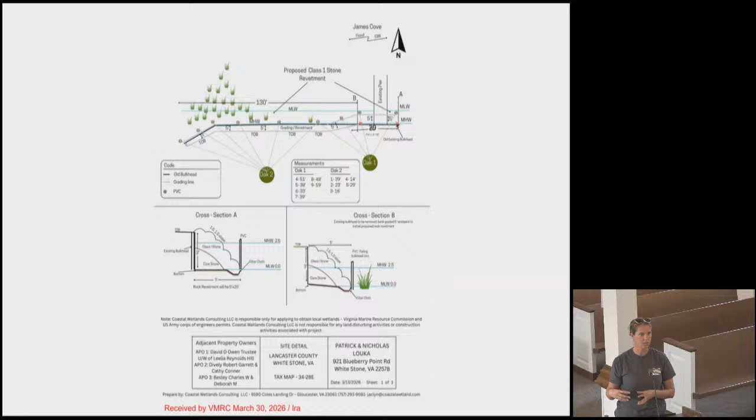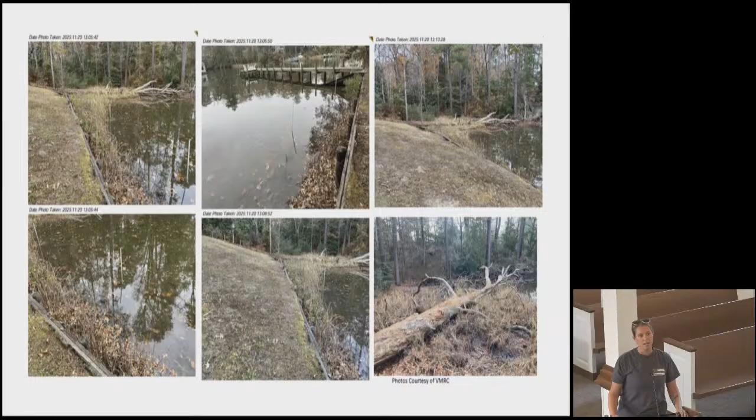Thank you, Madam Chairwoman. So what we want to do is grade the bank back 5 feet to get it in front of the existing wetlands, and then have the revetment go from there. The 20-foot under the dock, because there's no existing wetlands there, we decided not to mess with it and still have it in front of that bulkhead, which is also helpful. So it just kind of curves in, going behind all the wetlands out there. Is there any questions or concerns or anything like that?

Madam Chairwoman, if I may, if you look at the pictures on the screen, you can see what Jacqueline is referring to with the wetlands underneath the pier there. That's where the revetment is in front of that, and then they're going to grade that bank back. So that revetment will be more in the RPA, still a little bit in your jurisdiction in the back shoreline there. But that's what we're looking at today.

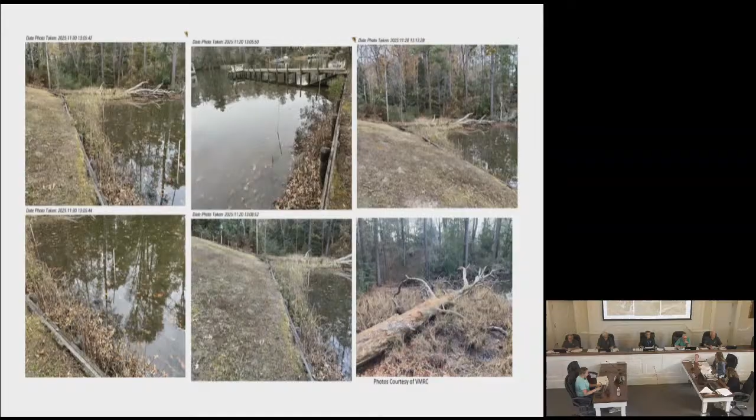Thank you. So you need a motion from the board. We want to ask VMRC their comments, and then the public hearing. Okay, do you have anything you'd like to add, ma'am?

No, ma'am, thank you. Is there anyone in the audience that would like to add anything? Anyone on the board have any comments? No, ma'am, I don't have a problem. If not, I'll entertain a motion.

Move the project be approved as presented. Was there a second? I'll second. All in favor, signify by raising your right hand. Okay, thank you.

All right, Madam Chairwoman, our next public hearing is for AJ Kuntamakala and Lavanya Reddy, care of Salterra Solutions LLC, PO Box 1744, Kilmarnock, Virginia 22482. The agent requests permission to install 360 feet of riprap revetment, Class 1 and 2 stone, 2 100-foot stone breakwaters, and 1 50-foot stone spur, Class 2 and 3 stone, with 9,000 square feet of sand nourishment and 900 square feet of wetlands plantings along the eroded shoreline of the Chesapeake Bay. Located off Virginia State Highway 3, Mary Ball Road on Windmill Point Road, map number 3645, VMRC number 2026-0852, and NAO 2026-00838. Joey Scott is the agent, and he is present with us.

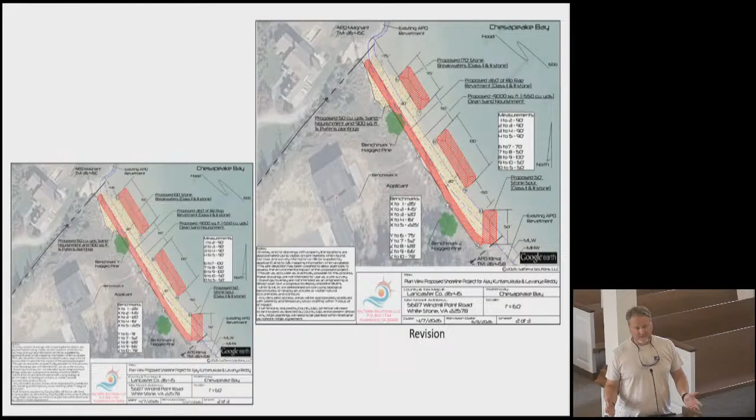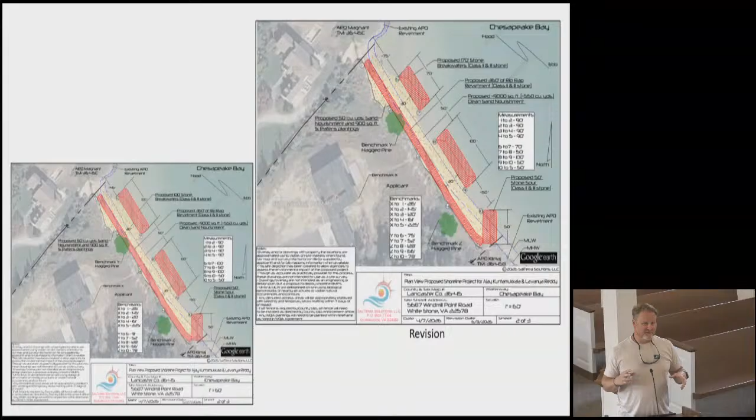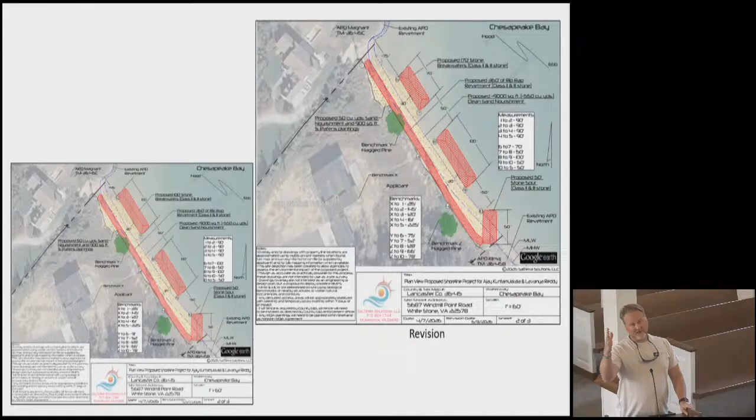Essentially what we have here, with the way that it is laid out, is two erosion control structures on one piece of shoreline. You guys are definitely familiar with this stretch. The 37 aerials show the shoreline actually being about another 800 to 900 feet offshore—there are actually some buildings out there in that water.

Then you've got the groins that are there now. They pretty much became disconnected in about the 60s, according to Mr. Clemay, who I did his revetment permit for next door. So there's a lot of retreat here that's hit on in the VIMS report—somewhere between 3 to 4 feet a year. It's looking northeast, and it's a hot spot.

So in coming up with an idea for trying to maintain the beach as well as protect the backshore, we have what has been proposed.

Now, the two structures are pretty much in response to other items I've seen along this stretch of shoreline. Further down where Mr. Fox is—I don't know if you remember that permit from a couple years ago—he had a couple of functioning breakwaters, and then they got overtopped, and he actually had to put in a revetment. I call it a revetment, but I'm calling it more like a beach sill, because it's really not a revetment—it just goes out just beyond the dune vegetation. He had to install that.

Of course, his house is a lot closer than the applicant's house is. But the main thing to keep in mind is that there was a breakwater there, and it functioned for years and years, and then all of a sudden it got overtopped a few times, and it was a big problem on the backshore. Same way with the Frank Burke stuff further north of here, where he built breakwaters offshore, and then later on had to come in and build revetments behind the breakwaters.

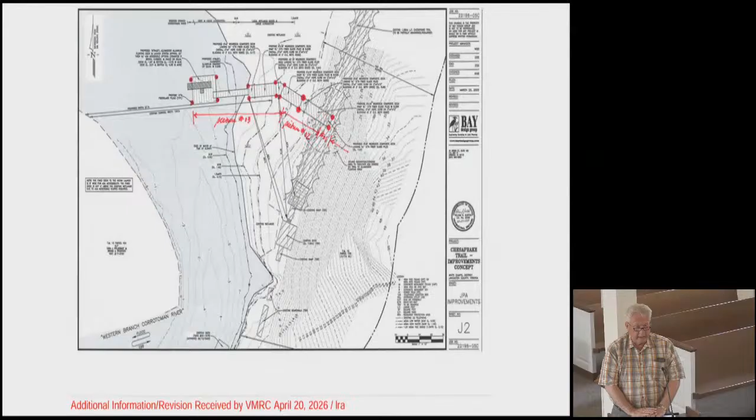It's a kayak launch, an Alumadock kayak launch set in the Corrotoman River, deep enough to support the launch even at low tide without resting on the bottom. What proceeds from that is a series of piers leading up to the Chesapeake Trail that's going to be under improvement by the county as another part of this project. It's basically 8-foot wide piers with various ADA accessible and resting spots. So there is no impact to the wetlands that we're going over or anything of that nature. I believe that at this stage, VMRC has indicated that there's no permit required from their side, and the Corps of Engineers has already approved this project.

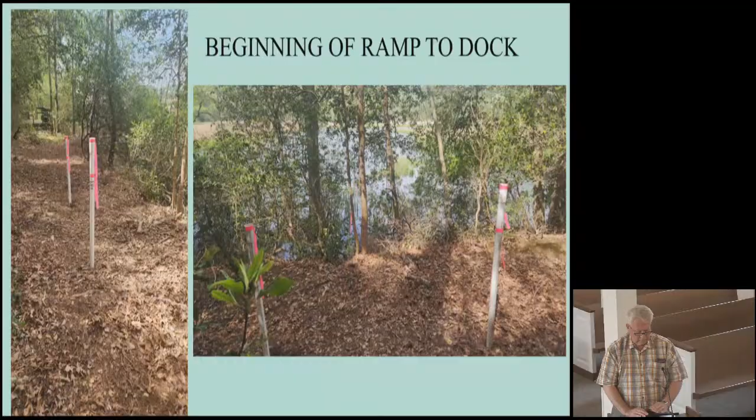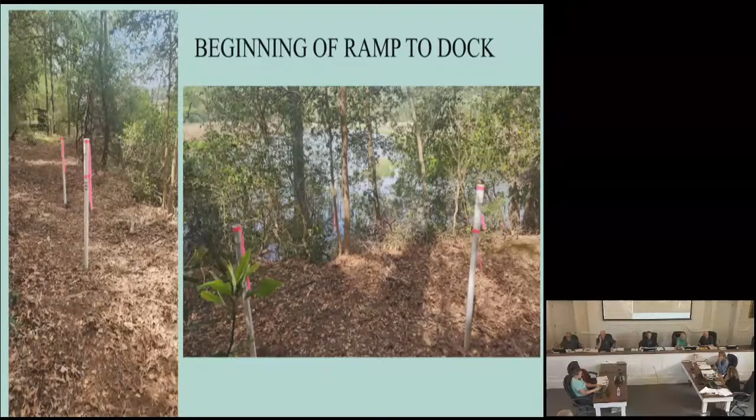I just want to go through a few pictures for you all. The hike out to where this ramp will be located and access launch is about a quarter mile. If you look at your screen, you'll see the PVC pipe showing where that ramping will start, and then it goes down that hill through the RPA, then out over this area, giving you access to the water. You can see where that launch is going to be located. This will give the public access to the Western Branch of the Corrotoman. It's a beautiful section just north of this building here.

That would be your access. And then you can either go up a little bit and under that bridge, or down the river the other direction. So thank you, Madam Chairwoman, we're very excited about this project.

And VMRC, do you have any comments? No, ma'am. The board, no, ma'am, I don't have a problem with it. Any comments from the audience? Is there anyone who wishes to speak on this? No, ma'am. Okay, if not, any further questions or concerns?

I'll entertain a motion, please. I move to approve the project as submitted. Second, please. I'll second it. All in favor? Okay, thank you.

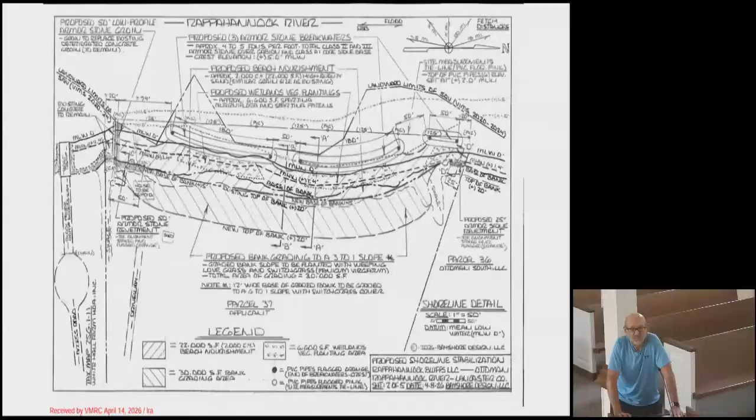Do you have any concerns? No, Madam Chairwoman, I have no concerns with the project. Looks like it's going to be very beneficial to the site based on that huge amount of erosion that you see in the pictures here.

This cliff, you guys have permitted similar projects along this same shoreline that have been very successful. We actually looked at a few when we were there because we went to the wrong site, but we made it to the right site. Craig helped us, and he provided these great pictures which show the extent of the erosion.

So, VMRC, no comment. Anyone on the board? I just want to be clear, you're going to excavate all 650 feet?

I'm sorry, I didn't hear you. He asked if you were going to excavate all 650 feet. Excavate all what, I'm sorry?

650 feet. Are you referring to the whole length of the shoreline? No, I'm looking at the drawing, I looked at the project, and all of that has... you're going to have to do something with it. It's a heck of a bank.

He's asking you about the bank grading. Yeah, the area you see in cross-section going on a 45-degree angle, that's all going to be graded from the groin on the east end all the way up to the swale. So the area where we stood on Tuesday around the property line, that's going to be left as is. That's where the toe revetment's going along the base of the bank.

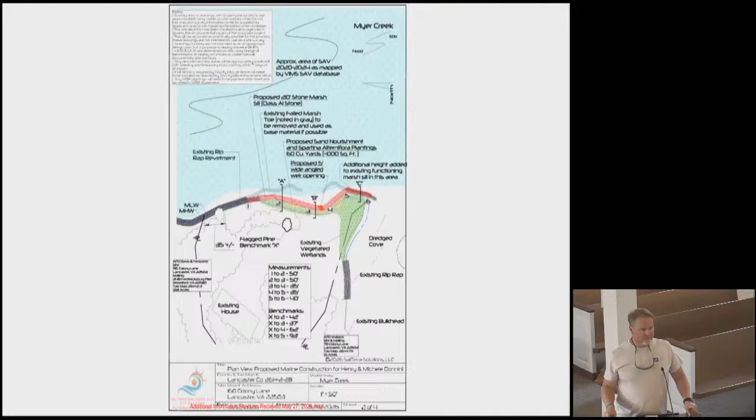As you can see, there was one there before, but this one will obviously be bigger and hopefully hold a little better than that one. Portions will need to be planted, obviously, where you've got those sections that are cut in. Just put some sand in there and plant that, and run that, coming off of that revetment right out into the waterway and shoot straight across there.

You're going to reuse some of the stone that's submerged right now? It's possible, sometimes the contractors will do that. It just depends on how big of a nightmare it is to try to reuse it. It will just depend—some of that stuff comes up nice and easy, and some of it does not. So I think when they bid most of these things, they don't count on using it.

Thank you. I guess if you have any questions for me. Okay, Olivia, do you have any? Staff has no further comment. I think you have something before you that Joey submitted.

Joey, was this a revision that was submitted? Did you revise this one at all? There might have been a change to the drawing. It's a good question, I think it was received May 27th. So we had some additional information that you provided—the 19th. Oh, yes.

The previous drawings didn't have a weir in it. Oh, okay, so we've added the weir. It was approved without a weir, but I got you. It's gonna have a weir, just kind of an angled one, since you don't want it looking straight out there. That little highlighted section there next to B.

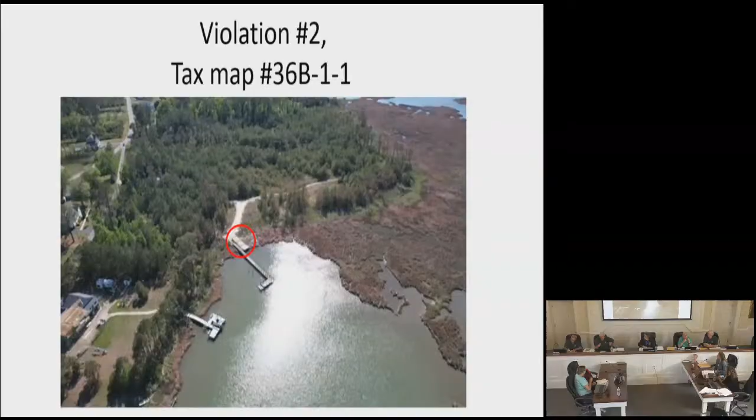So, Madam Chairwoman, I'm asking for a motion for the show cause letter to be sent by staff on your behalf. Madam Chairman, I make the motion for the Board to direct Ms. Hall to draft a show cause letter to be sent to the owner of both parcels on behalf of the Lancaster County Wetlands Board. Is there a second? I'll second. Okay, all in favor?